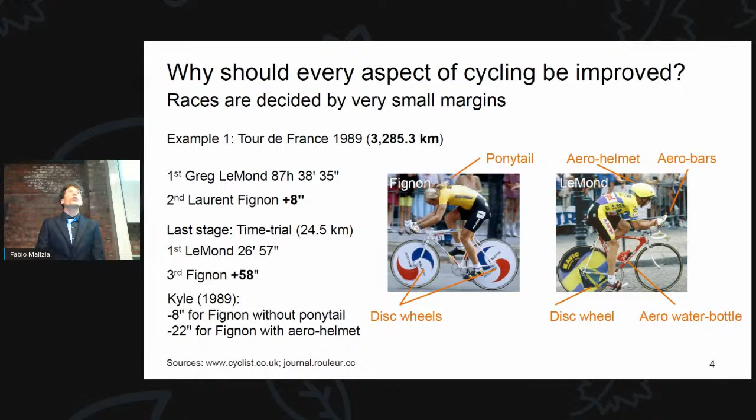Fignon had 2 disc wheels, but he didn't have any helmet, and his ponytail was flapping in the air. While LeMond had his aero helmet, aero water bottle, 1 disc wheel, and also the aero bars. And Kyle in 1989 found that even just cutting the ponytail would have given Fignon 8 seconds, exactly what he needed to win the Tour de France.

The third example is the Tirreno-Adriatico, a 1,000 kilometer race, 25 hours of racing, and Roglic last year won by only 0.31 seconds. And he gained 26 seconds in the last stage, a time trial, which is actually held in my hometown in Italy, San Benedetto del Tronto. And if we see the pictures, again, there is different equipment that was chosen.

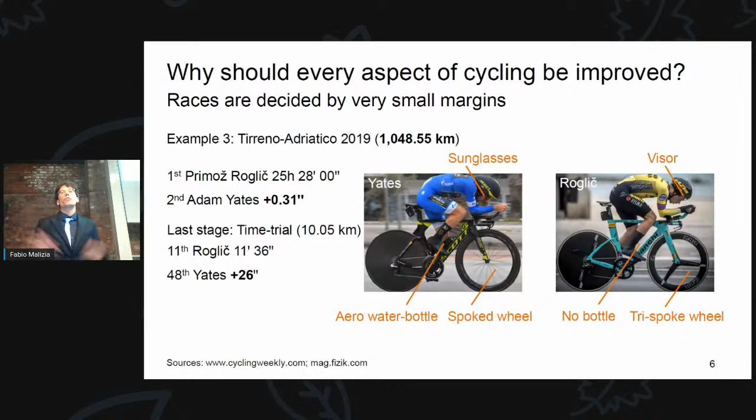Yates used the aero helmet, but not a visor, sunglasses, while Roglic used the aero helmet with a visor in front of him. Roglic didn't have a water bottle, he had a 3-spoke wheel, while Yates had an aero water bottle, but a spoked wheel, a wheel with many spokes. This time we have a different wheel in front of the bicycles.

Then we have shown that a small margin can really make a big difference in a cycling competition, both in single races and multi-stage races. Now I will introduce something we will see later. Aerodynamics is actually the major resistive force, up to 90% on a flat stage when you are riding fast. And through the mathematical models, Martin et al.

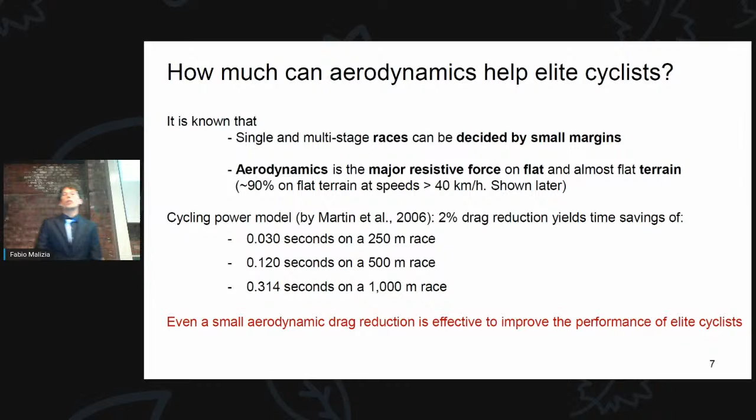It showed that even with a 2% drag reduction, cyclists can achieve a significant reduction in time. As we can see, these differences were always significant for the previous example. Then, a small conclusion of this introduction: even a small aerodynamic drag reduction is effective to improve the performance of elite cyclists.

Now, the contents of the presentation: after the quick introduction, we will go to the state of the art and research gap, then the objectives. Then I will take a step back. I will show the physics of cycling and the methodology I applied. And then we go to the results of my research project and then the conclusion.

Now, cycling aerodynamics includes many aspects. As we see here, Roglic riding a bicycle. We have the cyclist. Different cyclists have different anthropometric characteristics. They can have different positions on the bicycle. They can wear different skin suits, different helmets, and also the helmets can have different designs. Also the handlebar, which influences the cyclist's position. The frame, of course, every manufacturer has its own frame.

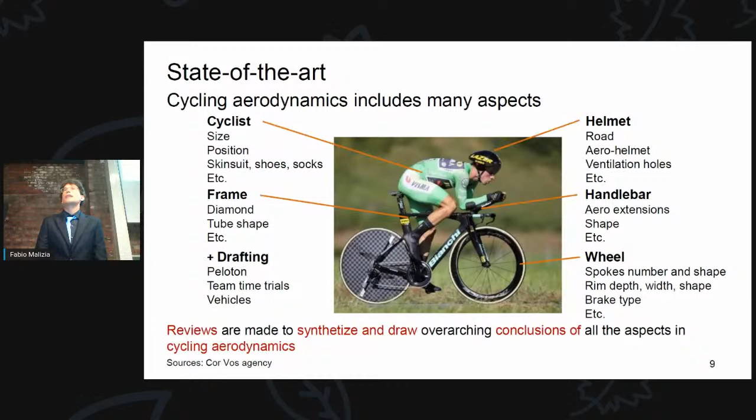But again, also the wheel. The wheel can have different types, disc wheel and spoked wheel in this example. But also the spoked wheel can have many spokes, different shapes of spokes, rim depth. There are many different designs. And cyclists don't usually ride alone, so there is also drafting to take into account. As we see, it's very complex. Cycling aerodynamics includes many aspects, and therefore there are reviews which try to synthesize and give conclusions about cycling aerodynamics.

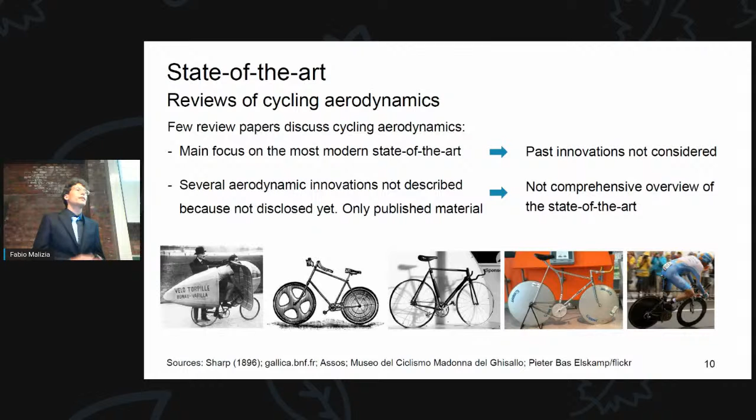Now, there were already reviews about cycling aerodynamics, but they mainly focus on the most modern state of the art, and they focus mainly on the published material, only research done by researchers in academia. While there were also past innovations, which had a role in the past. Even 100 years ago, we found some aerodynamic innovation in cycling, the first pictures from the left, for example. And we also need to take into account the innovation in aerodynamics made by manufacturers, because actually they also make the state of the art.

If we narrow our focus on the wheel, we see that in the Tour de France, which is riding right now, there are 14 different wheel manufacturers for the 22 teams. Every manufacturer produces different types of wheels, spoked wheels, 3-spoke wheels, disc wheels, and even different types of these wheels. For example, they have different spoked wheels with different rim depth according to every situation of the race.

But the previous research done in cycling aerodynamics mainly focused on comparison of these wheels, since there were so many designs. But there are discrepancies between the different studies, and we also found a lack of uniform testing, and this is also causing the discrepancies. About these two aspects, I will show some slides now.

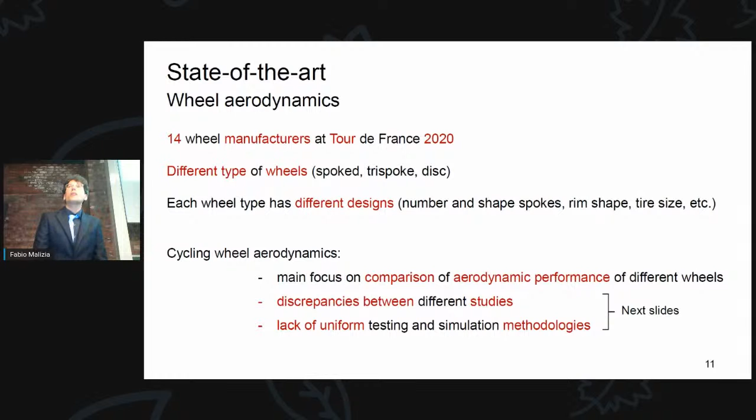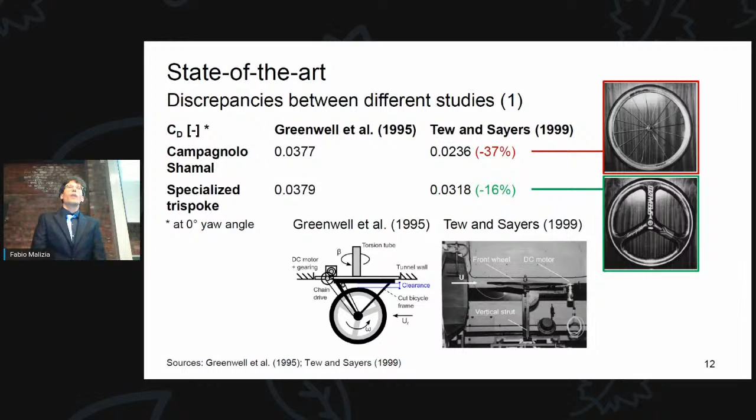Greenwell and Tew and Sayers tested two wheels that were the same, a spoked wheel and a 3-spoke wheel. And at 0-degree yaw angle, meaning when the wheel is aligned with the flow, they found even a 37% drag difference. As we remember, at the beginning we talked about marginal gains. 37% of difference is quite high when we need to choose the right wheel.

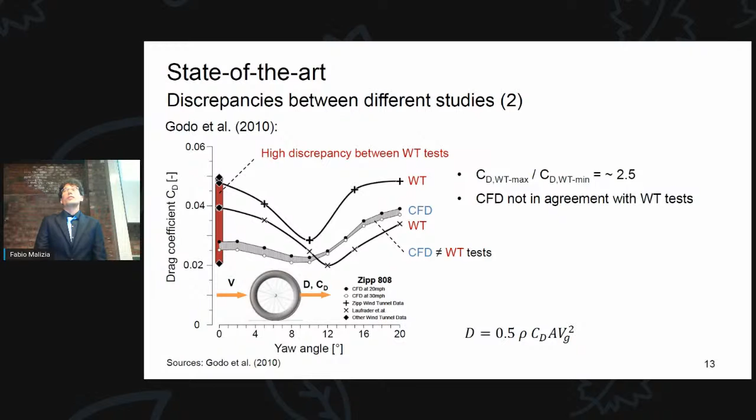The second example is Godo et al. They reported their CFD simulations and some wind tunnel tests available in the literature. Changing the yaw angle, meaning when there is a crosswind, the difference in the wind tunnel results varies between 10 and 40%. The trend is not really the same, and even the CFD simulations don't have the same trend as the wind tunnel tests. Higher discrepancies are found at the 0-degree yaw angle, the red column on the left, where some tests provided a drag coefficient of 0.02, while others 0.05. This difference is really quite substantial when you have to choose a wheel.

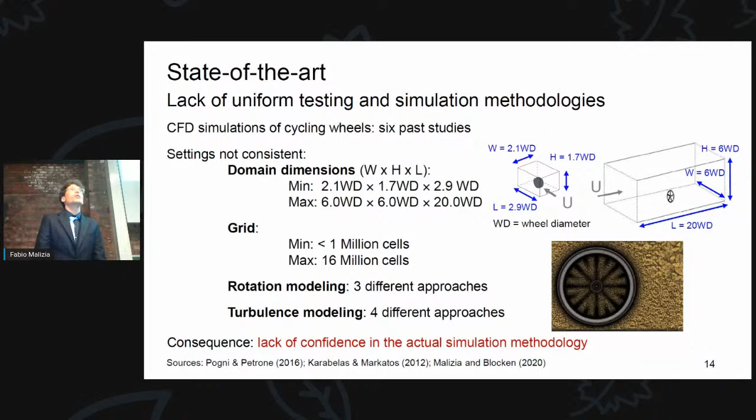And for the way the wheel rotation was modeled, 3 different approaches were used, and for the turbulence modeling, 4. This means that there is a lack of confidence in the actual simulation methodology, meaning also, for me, when I started this research project, I actually didn't know which settings I should use. Therefore, I identified this research gap.

We need an extensive literature study, also to not talk only about the recent state of the art, but also the past one, and include also the innovation made by manufacturers that had a contribution to actual records or competition, to win a competition. When we talk about wheel aerodynamics, we need to know the impact of computational parameters and physical parameters, and also to understand the difference between testing or simulating a wheel isolated or together with the bicycle and the cyclist, because often the wheel is simulated or tested alone.

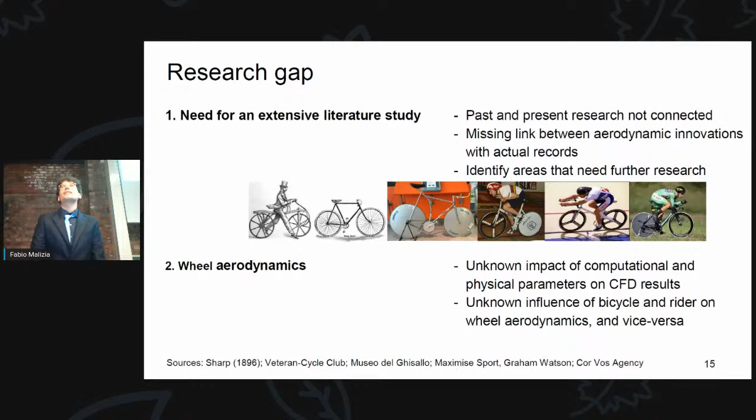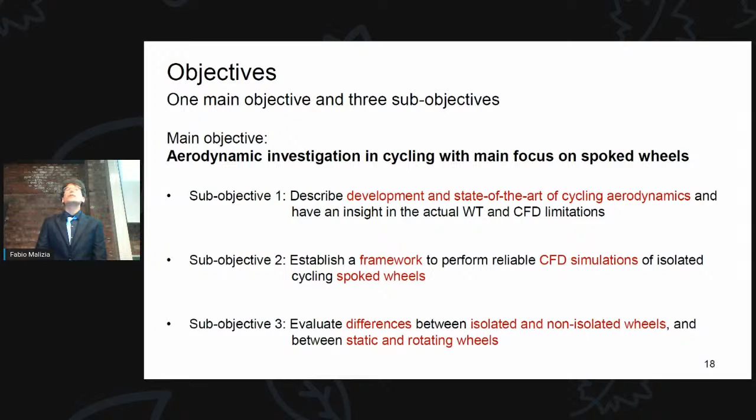Therefore, the main objective of my thesis is to perform an aerodynamic investigation in cycling with main focus on spoked wheels. This yields 3 sub-objectives: describe the development and state-of-the-art of cycling aerodynamics, then establish a reliable framework to perform CFD simulation of spoked wheels, and then lastly, evaluate the differences between isolated and non-isolated wheels and static and rotating wheels.

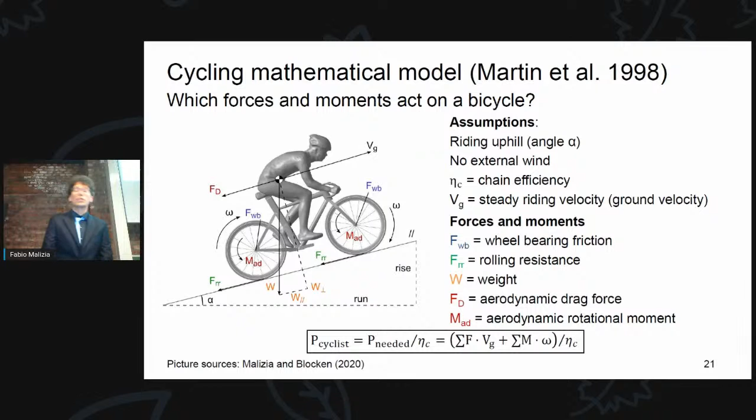Also, there is an aerodynamic moment caused by the rotation of the wheels. Often this quantity is not taken into account in the model simulation. If we put all together, including also the efficiency of the chain transmission, this eta C, we can have our model. But what I want to show here mainly is the dependence of every force and moment on the velocity.

The aerodynamic terms are dependent on the square of the velocity, while the rolling resistance doesn't depend on the velocity in this model from Martin et al. There are some papers recently that question this dependence, but in general, we will consider here that they are not dependent. Then the potential power loss due to the weight is not influenced by the velocity, while the bearing friction has a velocity term in the equation.

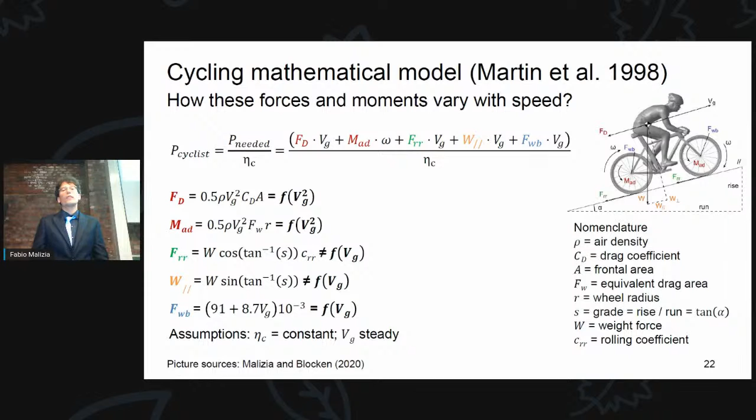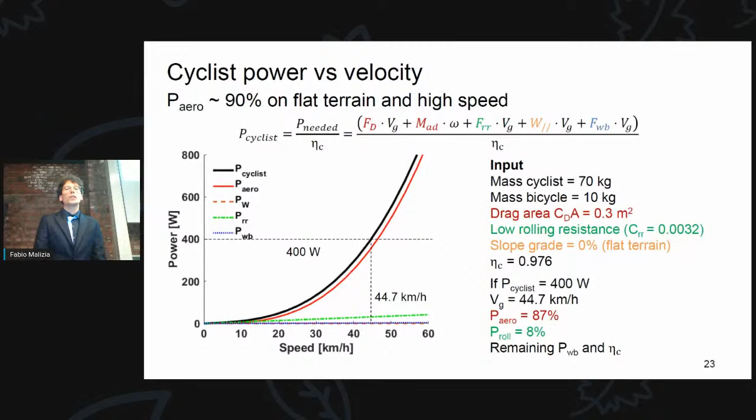Then, if we play with this model and we put as input a cyclist of 70 kilos, a bicycle of 10 kilos, an average drag area of 0.3 meters squared, riding on a flat terrain at 0%, you can see that aerodynamics is the major resistive force when we are at high speed, almost 90%. Then, if we vary the drag area, which is a quantity related to the aerodynamics of the cyclist, from 0.2 to 0.4, there will be a difference of almost 10 kilometers per hour.

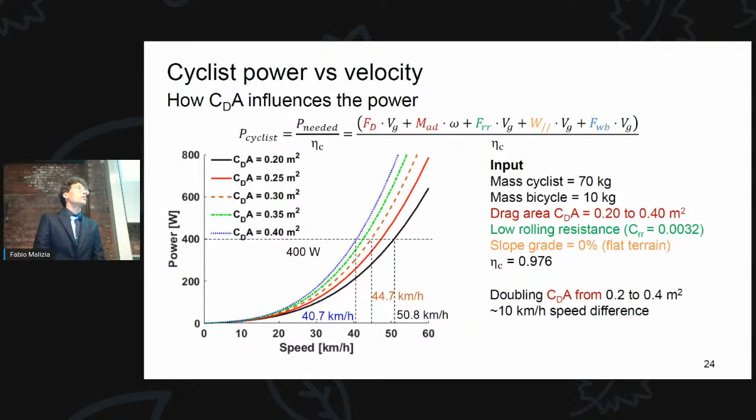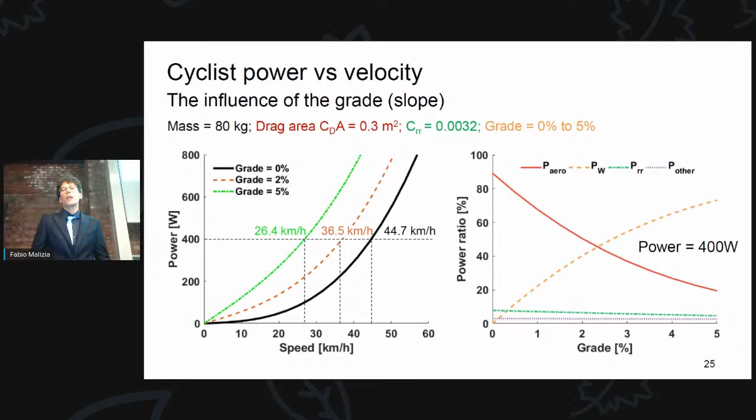Even when we go uphill, with a grade from 0 to 5%, at the beginning, when the slope is not much high, the aerodynamic power loss is still the major resistive force, while going more uphill, the potential power loss will be the major resistive force, but still aerodynamics play an important role. However, at the end, this was mathematics, but how fast can you go with a bicycle?

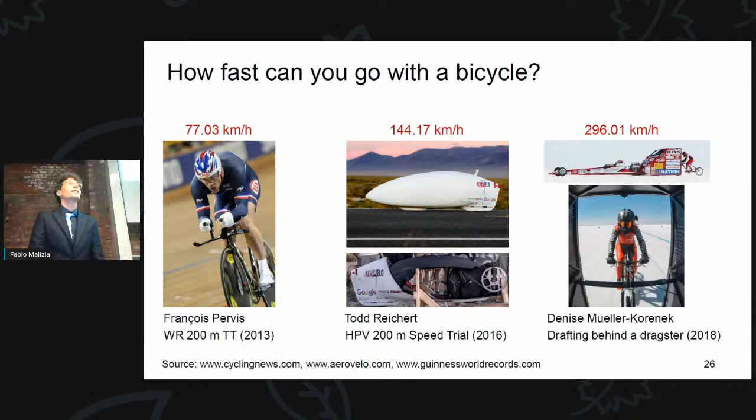These are 3 examples. In the world record of the 200-meter race, he managed to achieve an average speed of 77 km/h. If now we question what is a bicycle, and we consider a bicycle also a vehicle with 2 wheels, just powered by a human, and with an aerodynamic enclosure, they managed to achieve a 144 km/h maximum velocity. But if we ride a bicycle behind a dragster, I would never do it because I would be scared, but in general, Denise Mueller-Korenek managed to achieve 296 km/h, which is impressive.

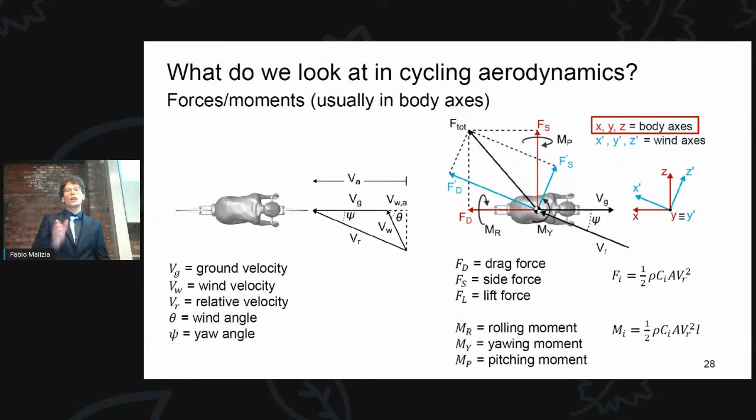In general, in cycling, we use a body axis, therefore the forces are aligned with the cyclist. Therefore, later when I talk about drag, I will always refer to the force component aligned with the riding direction. But we can also have a look at pressure, velocity, and vorticity. And how do we do this? We can do this through wind tunnel tests, CFD simulation, or field tests.

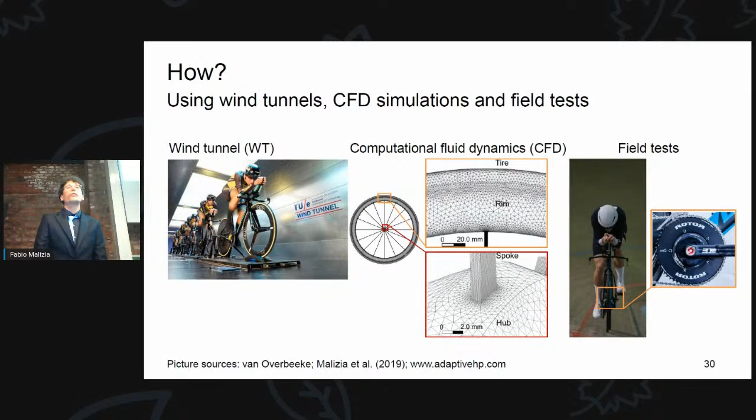Now, I will briefly show the first 2 methods. In general, a wind tunnel is a tunnel or a pipe, as you can imagine. There will be air moving inside, and the cyclist will usually be placed on a force balance, and this force balance will provide you the forces and the moments acting on the cyclist. But we can also put pressure taps on the cyclist's body, which will provide the pressure on the cyclist, or use optical methods or other methods to obtain information about the velocity.

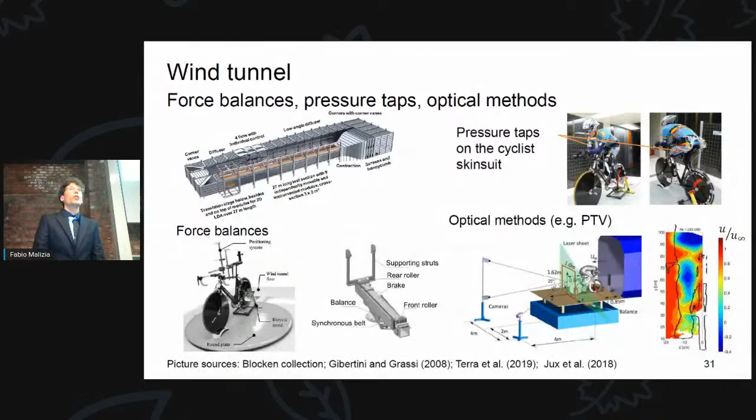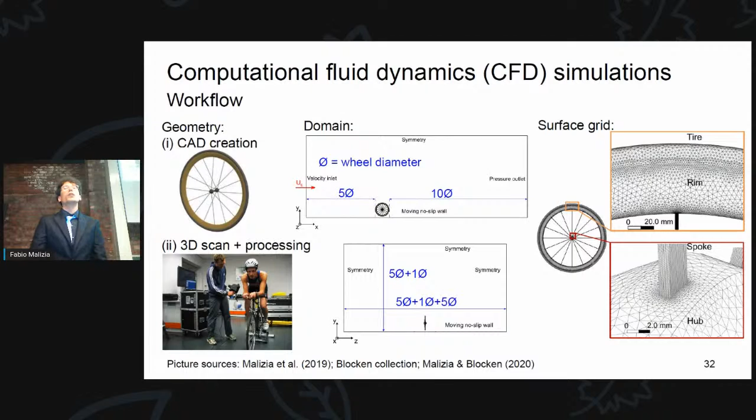While in CFD simulation, in the usual workflow, the first step is to create a geometry. We can do this through CAD design or by acquiring the geometry with a 3D scanner. Then we build the domain and the surface grid. We discretize the surface of the body of interest, in this case, the wheel. Then we create the volume grid. Then we put in all the settings, run the simulation, and post-process the data.

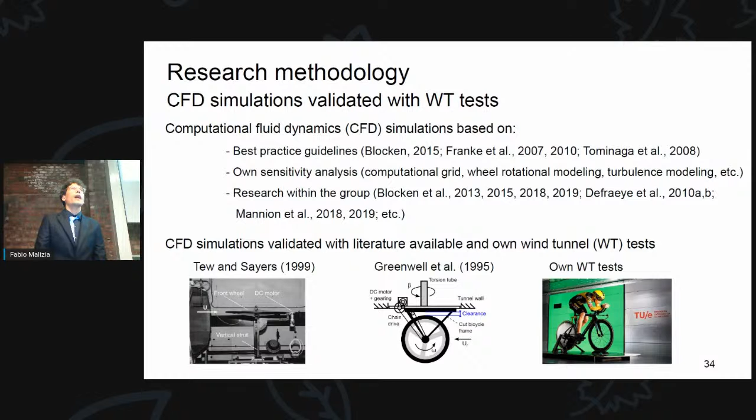What I've done in my research was mainly performing CFD simulations based on best practice guidelines, my own sensitivity analysis, and research within the group. These CFD simulations were validated with wind tunnel tests available in the literature and, when possible, my own wind tunnel tests. Now I'm going to show the different parts my research project is constituted of.

In the first part, I'm showing the evolution of cycling aerodynamics. Many people believe that cycling aerodynamics is a very modern topic, but actually it isn't. Even at the beginning of the cycling era, in the late 19th century and beginning of the 20th century, there was a sort of empirical knowledge of cycling aerodynamics. We found cyclists riding inside aerodynamic enclosures. These are the first pictures. But there was also the development of the dropped handlebar, which we still find nowadays. Cyclists were also riding behind motorcycles because they found that while drafting, they could achieve a higher speed.

However, due to some bans of the UCI and World War II, probably, aerodynamics kind of disappeared from cycling. There was no aerodynamic innovation; it was never taken into account in these years. While in the late 70s and beginning of the 80s, there is a rebirth. We find the first skin suit. Then bicycles also started to be built with aerodynamic tubing, and new handlebars, both in shape and position.

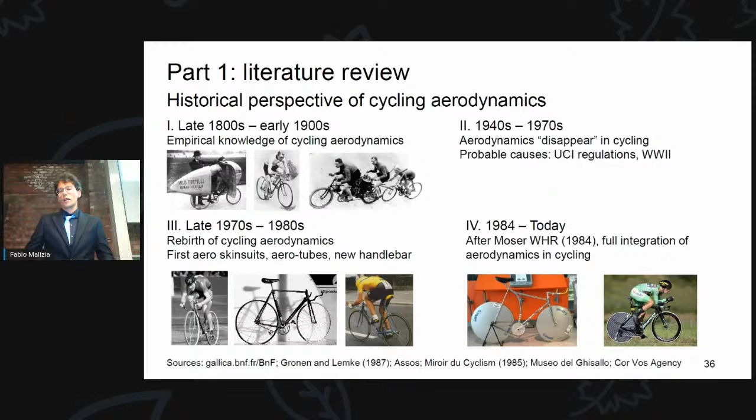But they didn't make a real breakthrough, which happened with the world hour record of Moser, achieved with a bicycle with 2 disc wheels. However, this bicycle didn't have aerodynamic tubing, for example. Therefore, there was still some possibility to improve. And after that record, aerodynamics started to always be considered in the design of new bicycles.

Now, the literature review covers all the aspects. However, here for brevity, I will focus only on the wheel. And as we can see, already more than 100 years ago, there were designed and patented wheels that are the same ones we consider aerodynamic today, a 4-spoke wheel and a disc wheel. But there was no systematic use of these wheels.

I couldn't find a real motivation, but it's probably due to the fact that these wheels have high instability when there are strong winds. Indeed, in these pictures, there are 2 bicycles with aerodynamic enclosures and 1 bicycle with disc wheels, and that bicycle crashed on the last curve due to a wind gust. Then, for 100 years, wheels were not innovated, at least in terms of aerodynamics.

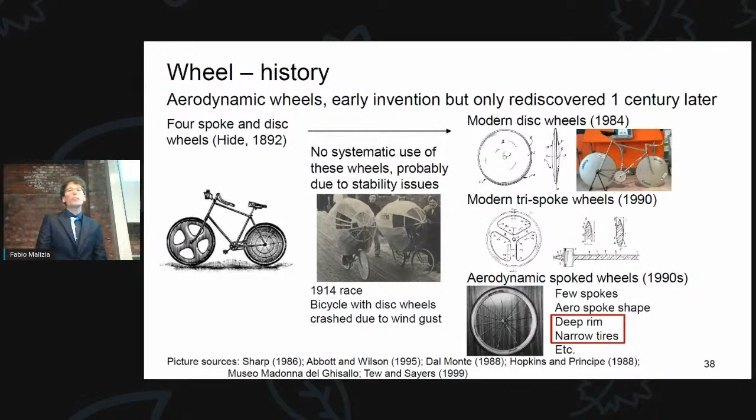But in 1984, we find these disc wheels, and soon after, 3-spoke wheels and also aerodynamic spoked wheels were developed. For example, wheels with fewer spokes, aero-shaped spokes, deeper rims, narrow tires, and other aspects. A few of them I will show now.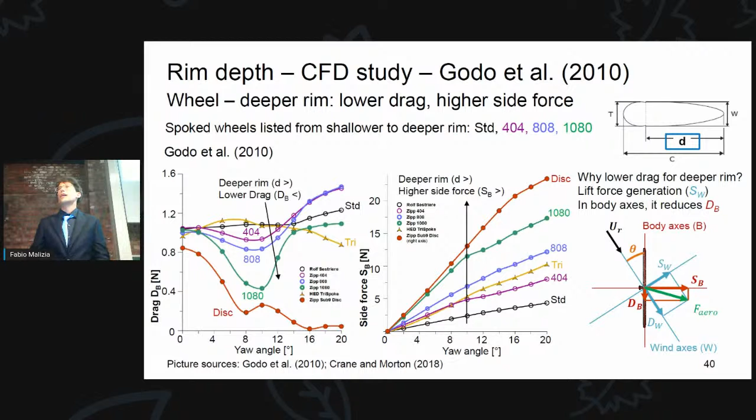As we see also, the disc wheel has the highest side force, as before we said, that has stability problems.

Then, if we consider the rim to tire width ratio, these two numbers in red, T is the tire width and W is the rim width. It was found that this ratio should be equal to or smaller than 1 to have the best aerodynamic performance. These wind tunnel tests were performed by Crane and Morton in 2018.

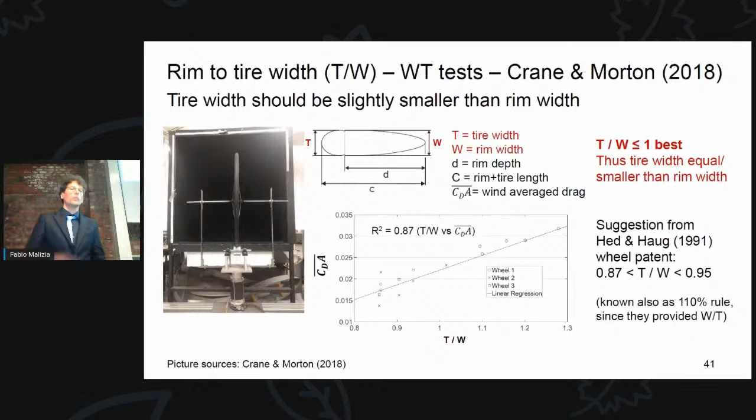However, this was not actually new, because there was a patent in 1991 stating the same thing. It introduced the 110% rule, and it's 110% because in the patent they talk about rim width over tire width, which is the opposite ratio. But in general, the conclusion was the same.

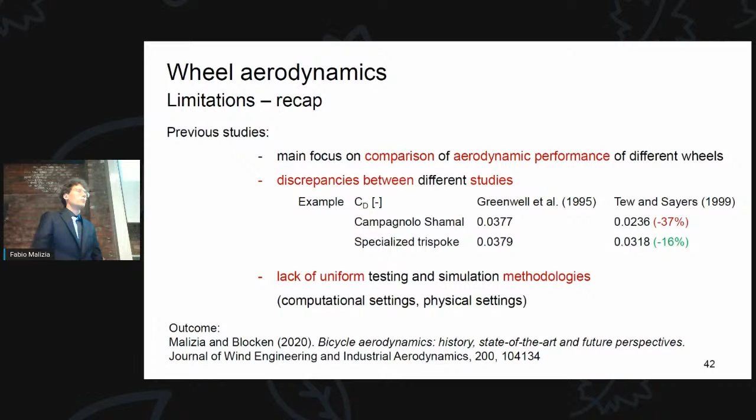However, I want to recap the limitations of these studies: they mainly focus on comparing different wheels or different wheels and tires. There are discrepancies between different studies, even 37% drag difference, and there is a lack of uniform testing and simulation methodologies. The outcome of all the wheel and other aspects of cycling aerodynamics are summarized in a paper.

In the second part, I will talk about establishing a framework to perform a CFD simulation of spoked wheels. Mainly, I will investigate the impact of computational parameters and the wheel-ground contact modeling. There are several parameters, but I will talk only about a few of them.

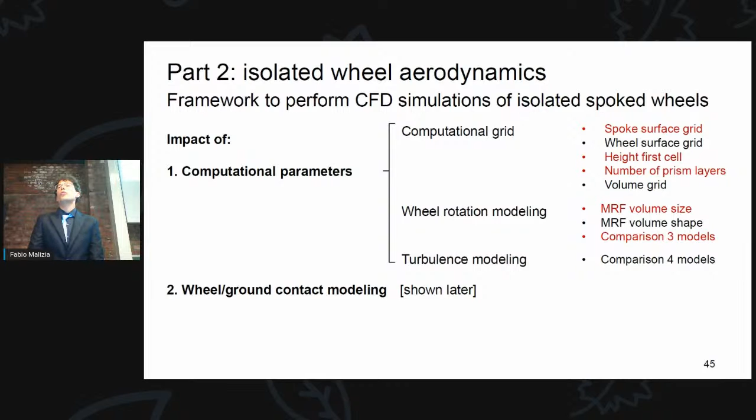Starting with the surface grid, taking the smallest element, which is the spoke, as we talked before about marginal gains. Does it make a difference how we discretize the spoke? Actually, yes, both in terms of computational cost, because if we reduce the grid size on the spoke, the surface grid and volume grid will increase significantly, causing an increase in computational cost, but also in terms of the computed drag.

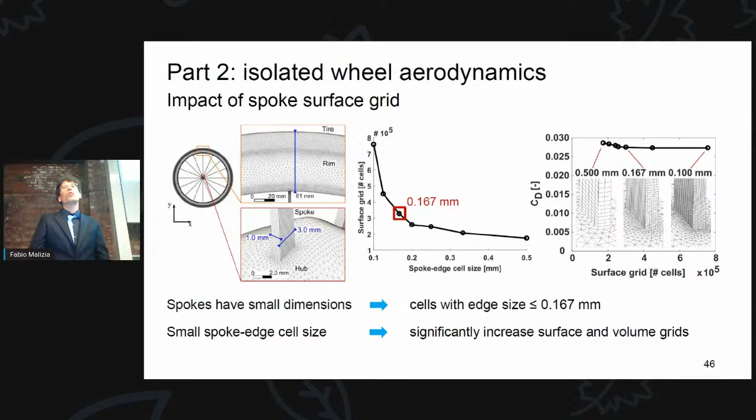The result was that the width of these cells should be smaller than 0.167 millimeters. Just as a matter of reference, a wheel usually has a diameter of 700 millimeters, so we can understand how this scales up the simulation cost. Indeed, we need a small spoke edge size, but not too small, because otherwise the computational cost increases too much.

Then the second aspect is the volume grid, mainly the height of the first cell, which is usually described by the number y plus. The general guidelines for the turbulence modeling I'm using for this type of flow suggest y plus smaller than 5, or best equal to 1. Actually, from the simulations I performed, the maximum y plus I recommend is 3.5, not 5, and ideally always 1. The number of prism layers, these wedge cells here, the minimum is 12, but usually more is better.

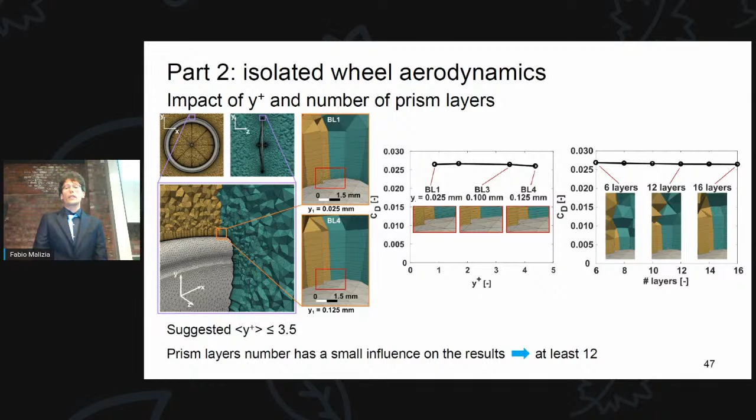Then I investigated the rotational modeling of the wheel. In this type of simulation, there are 3 possible approaches: the rotating wall, where we apply a velocity on the surface of the wheel, and the moving reference frame, where we use a different reference frame with added acceleration terms to reproduce the effect of rotation. In the MRF approach, this moving reference frame volume, shown in gold color, encloses the wheel entirely. In the third case, the moving reference frame approach is applied only around the spokes, while in the external part of the wheel, which is a body of revolution, a rotating wall approach is used.

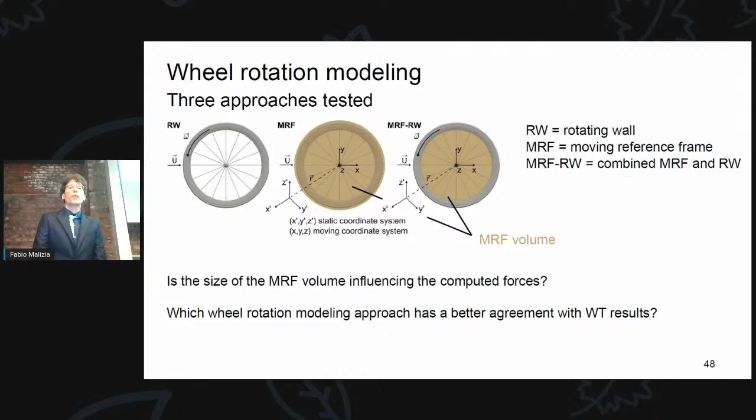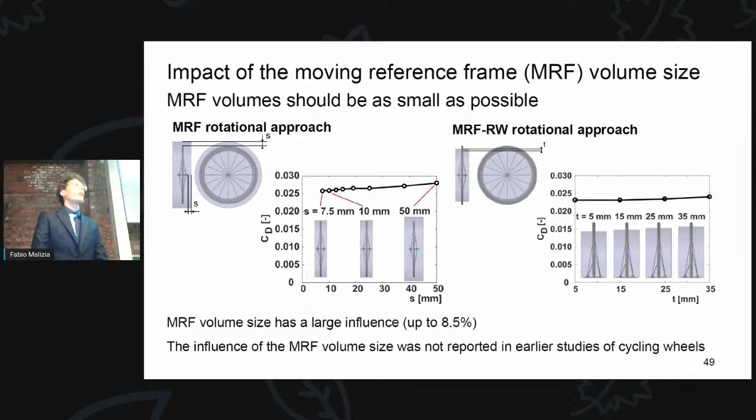Now there are two questions we can ask: does the size of this moving reference frame volume influence the results, and which of the three approaches is best? Actually, the size of the moving reference frame volume has a high influence, and I was very surprised that this was never reported, at least to the best of my knowledge, in other computational studies about wheel aerodynamics. This might also explain some of the differences in results obtained in other studies. The suggestion here is to always use a small moving reference frame volume, in both cases, whether you use MRF or the hybrid MRF-RW method.

If we compare the performance of these 3 rotational modeling approaches against wind tunnel tests, we found that the best model is the moving reference frame with the rotating wall, the hybrid method, giving an agreement of around 2%. If we remember that errors between CFD simulation and wind tunnel tests were even 30-40%, this is quite a good result.

The outcome of this impact of computational parameters is summarized in a paper we published in 2019.

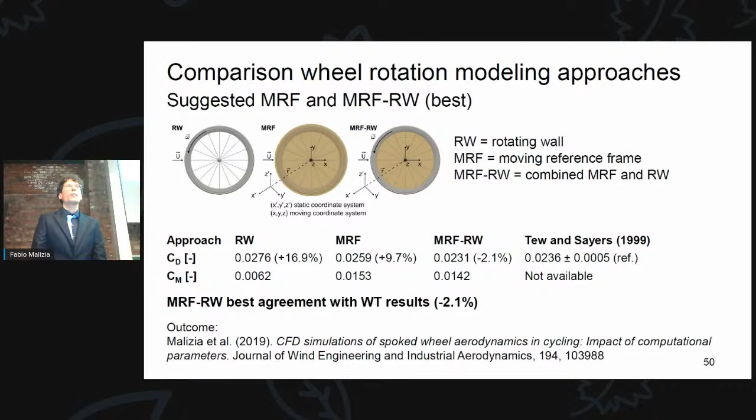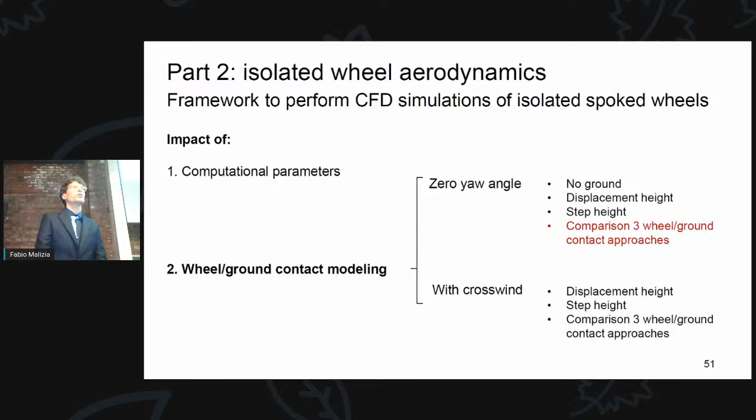The other aspect I investigated is the wheel-ground contact modeling. There are different aspects, including the zero-yaw angle case and with crosswind. I will show the case with zero-yaw angle. Why do we need to model the wheel-ground contact?

In car aerodynamics, this wheel-ground contact modeling has a large influence, but it was not known how it applies in cycling — it was never studied. We also don't know which approach is best for our case, and how much the distance or step height should be.

Therefore, I performed simulations for different clearances between the wheel and the ground, and also applied different step heights, testing two different boundary conditions on the step: a rotating wall and a translating wall.

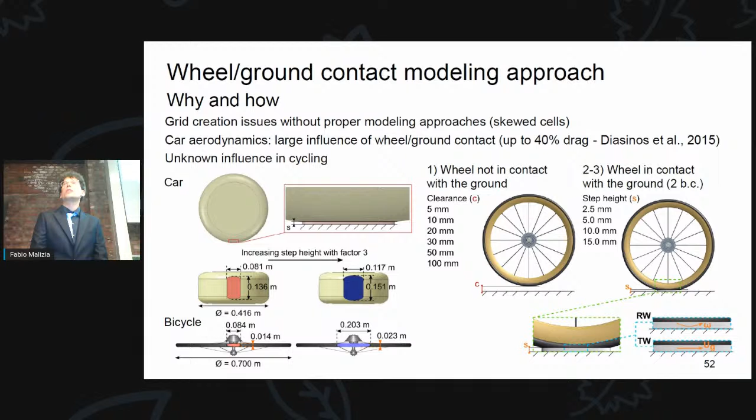The sensitivity analysis I performed showed that the step height should be as small as possible, but a too-small step height will also cause problems in meshing. The clearance should also be smaller, in this case 20 millimeters.

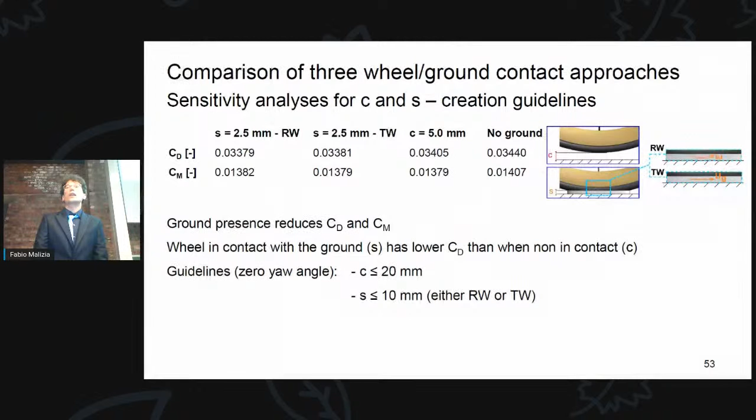The difference between the case with the step, under both boundary conditions, is almost negligible — the first two columns. When the wheel is displaced from the ground, there is a small difference of about 1–2%. Removing the ground entirely will even increase the drag and the rotational moment.

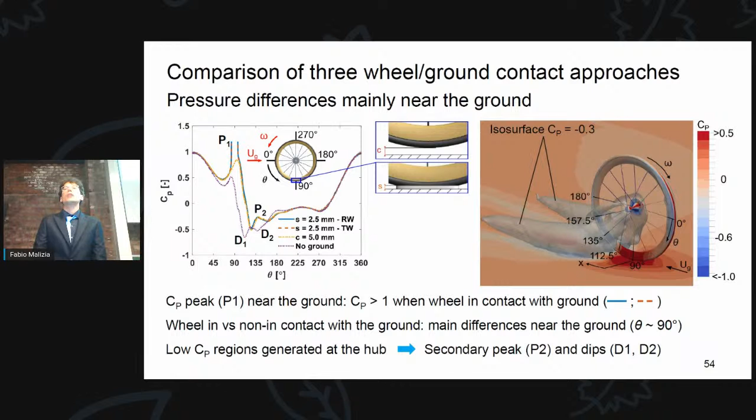There are some small dips and peaks, caused by the interaction of the wheel with the low pressure flow detaching from the ground, from the hub, and from the gears, as seen in the right pictures.

The results of this study, along with the crosswind study, are summarized in two published journal papers. Now we move to the last part of the presentation, talking about the non-isolated wheel.

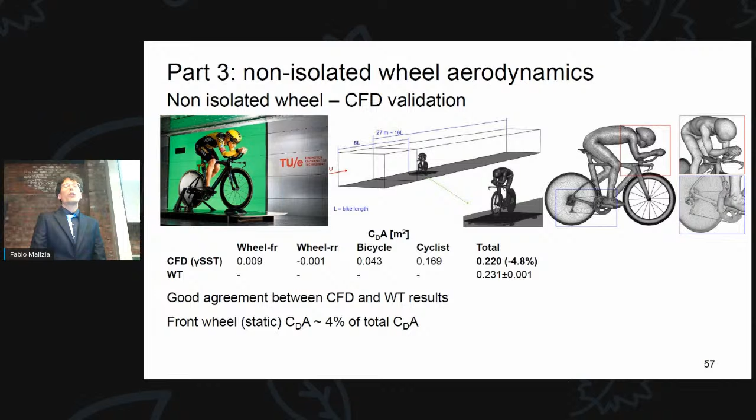We performed our own wind tunnel test at TU Eindhoven, and found that my simulation had very good agreement, 4.8%, which is very good when considering the entire cyclist and bicycle system. The front wheel, with wheels kept static, had an impact of around 4% of the total aerodynamic drag of the system.

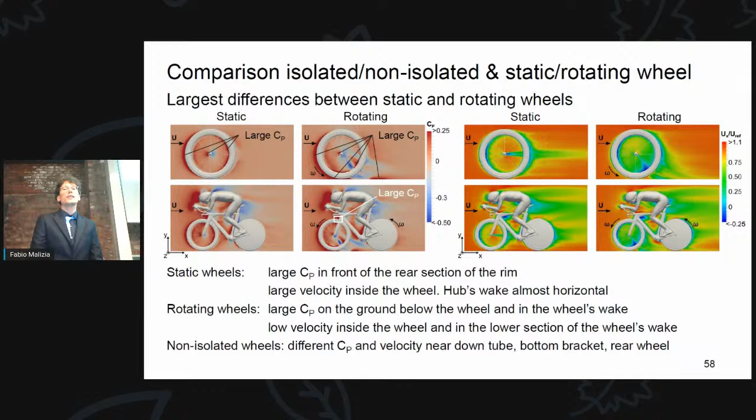In the static case, there is high velocity inside the wheel, while in the rotating case, the velocity is much smaller.

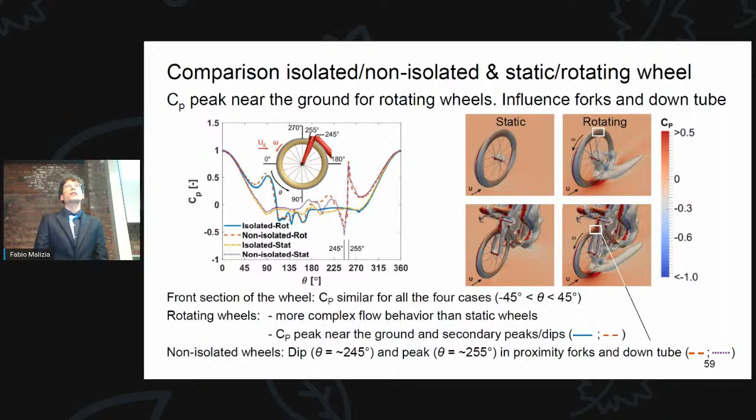Moving in the top rear section of the wheel between 180 and 270 degrees, the situation changed. We observed there are still 2 groups of behaviors, but now what makes the difference is whether the wheel is isolated or non-isolated. The purple and red lines are the non-isolated case, and this dip around 245 degrees and peak at 255 degrees is caused by the interaction of the wheel with the down tube and the forks. Going back to the front part of the wheel between 315 and 360 degrees, all cases again show a similar behavior.

Now we can go to the conclusion and novel aspects of this research. We found that even how we discretize the spoke-edge size has an impact, and that we should have a small cell size for the spokes.

For the prism layers, we should have a Y plus smaller or equal than 3.5, with at least 12 layers. When we apply a moving reference frame volume approach in the hybrid case or not on the full case, the size should be kept as minimal as possible. For the distance between the wheel and the ground, it should be at maximum 20 millimeters when there is no wind, or 10 millimeters with wind, and the step height should be maximum 10 millimeters.

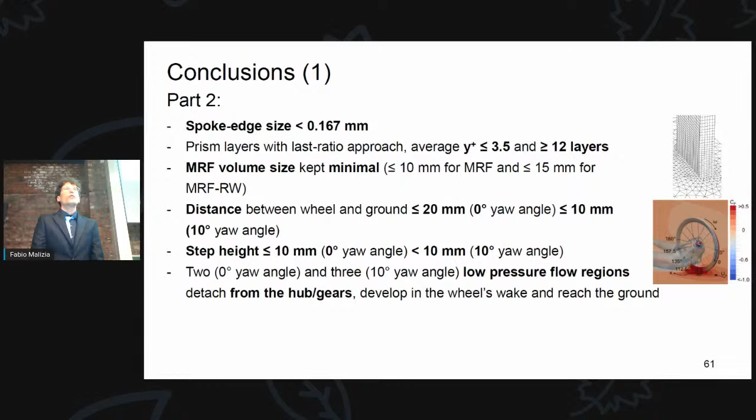We also made some flow visualization to show how the flow is behaving around the wheel. Then the last part of the conclusion covers some other results which I didn't discuss before.

We found that the main difference in the pressure contours is caused by whether the wheel is static or rotating. The rotational moment also has a large influence on the performance of the wheel, and this quantity is often neglected, while it is important to quantify the performance of the wheel. It also has an impact on the total cyclist-bicycle case.

We found that the low pressure flow region identified before for the isolated wheel case is also found for the non-isolated case, but only if the wheel is rotating.

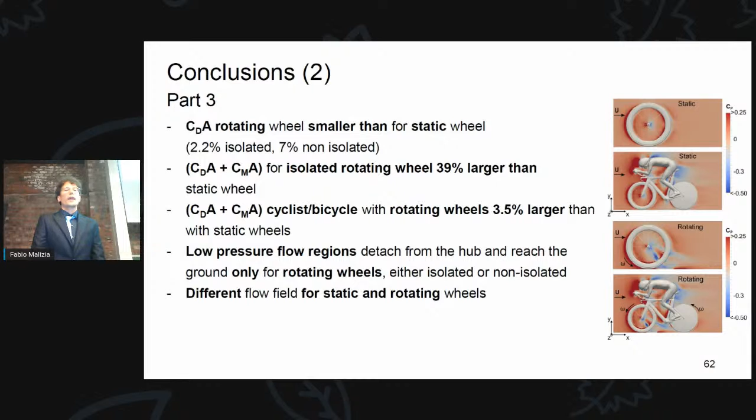The novel aspect of the thesis is that I provide a comprehensive review of the evolution trends in cycling aerodynamics. There was a first detailed quantification of the impact of computational parameters and also of the impact of wheel-ground contact modeling. I provided CFD guidelines to perform simulation of spoked wheels and also flow visualization around the spoked wheel, and we also got more in depth about the effect of rotation on the wheel.

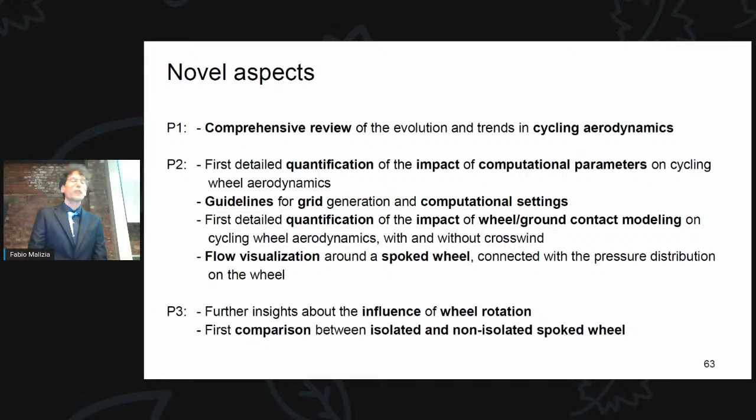I also made comparisons between isolated and non-isolated spoked wheels, which was also new. Thanks.

Can I speak from this side? Yes, no problem, it's a multi-directional one. Okay.

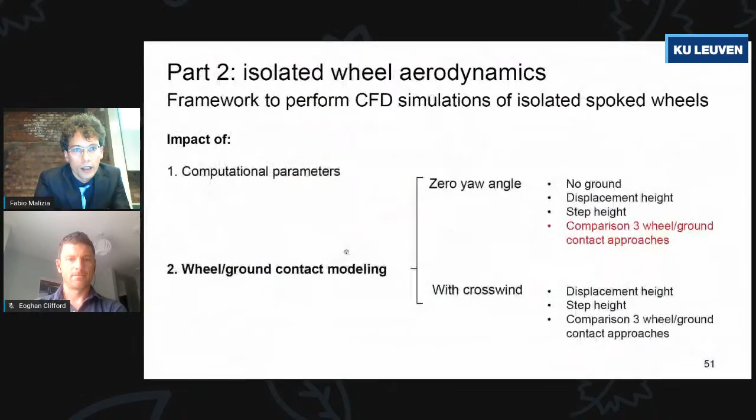Yes, I can. Let's think for simplicity of the case with the step. I think I also presented one slide, but now it's complex. Can we put the slide up, Natasha, as well? Sorry, because with the slide it's better. Okay, this slide.

Okay, now we see. For example, the bicycle has a footprint, in this case with the step, in the last pictures on the bottom, which changes in size when we change the step height. But if we think of the case with crosswind, let's rotate the wheel. The front part of the step facing the incoming wind is much bigger, because if we rotate it, it's not so slender anymore, it becomes more bluff. Since the size is increasing, this causes the differences in the guidance above 10 degrees yaw.

The clearance that you require doesn't need to change further, you believe? It might change. I didn't simulate it. It might change, but we also need to think that the probability of encountering wind at 20 degrees is much lower. That is why I focused on up to 10 degrees, because it's most common.

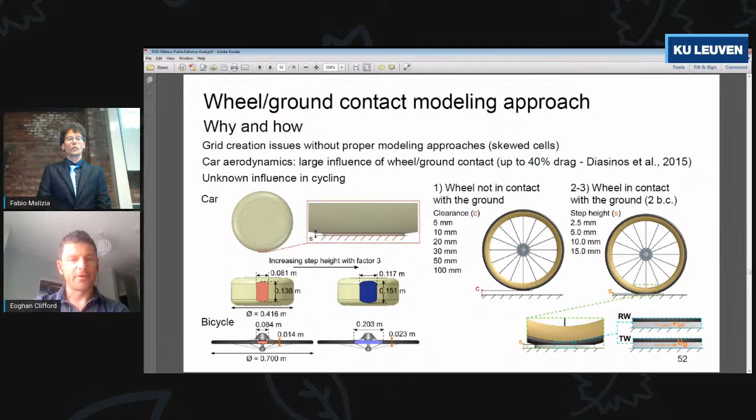Okay, that's all the questions I have, and thank you very much for your answers. You're welcome. Thank you, Eoghan. Professor Grappe, please. Fabio, thank you very much for your great and very interesting presentation.

Your presentation is very complementary to your PhD, and it's a very, very nice presentation. So my question will be rather on the general use of the results of your thesis, more on the practical

field, because our current problem on the teams is to try to make the better choice for the wheels according to the terrain, and our problem is what is the better choice for climbs, flat terrain, and also when you have a lot of acceleration during certain phases of cycling.

For example, when riders are in an effort on a 7% slope, the speed of the bike is not a linear speed, with different phases of acceleration, and you have a lot of kinetic energy. And if you take, for example, wheels with not important height but poor stiffness, it's difficult.

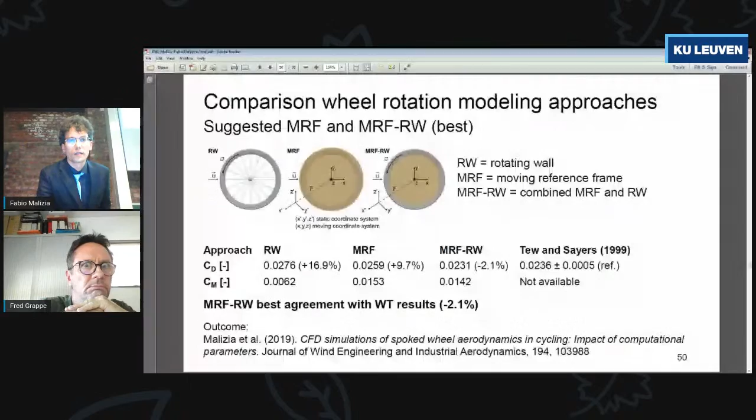Usually it's best to have a tire that is slightly narrower than the rim. And the explanation is probably that if you have a tire much larger, then the flow separates and will not reattach and will not exploit the aerodynamics of the rim. While even if the tire is slightly smaller, maybe there is some separation, but the flow might be able to reattach and follow the rim shape. This is the explanation I gave myself. And also the patent before confirmed the same results.

I didn't test myself, but in general, I would always go to have a tire width which is the same or slightly smaller than the rim width, and try to have not much space between them, and the transition between these two components as smooth as possible. This is what I would do.

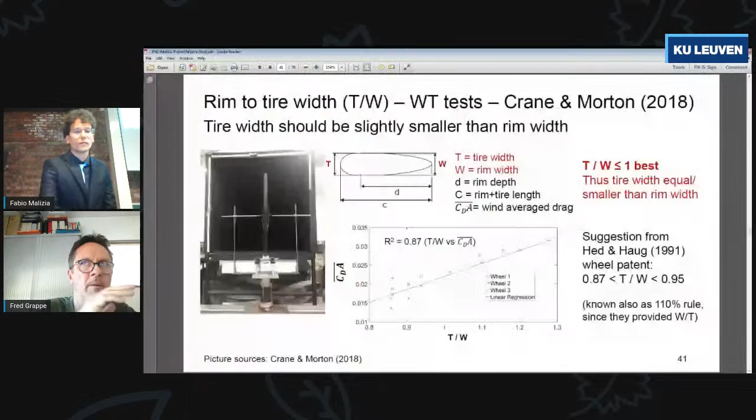Sorry, I didn't understand. Can you repeat, please? Sorry, there was no connection. I lost you. Okay.

My question is about the interface between the tire and the rim. The UCI rules say that you don't have the right to put a surface between the two parts. And sometimes there is not a perfect shape between the tire and the rim. So what is your opinion about that? Do you think the height of this interface is important or not important?

It might cause some flow separation, some recirculation bubbles over there if there is too much space. The best, at least what I've read also in some papers in the past, is that this transition should be as smooth as possible.

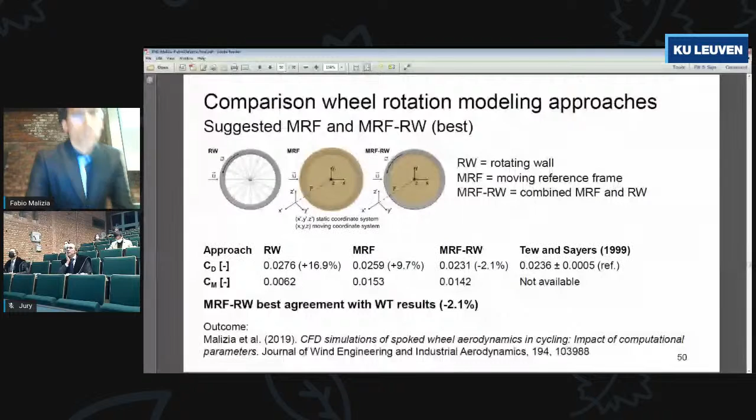Maybe a last question, a little bit more technical. You also showed this comparison between MRF and MRF RW, and your conclusion is that MRF RW is better. Can you explain from a physical point of view why that is? This was in comparison with the wind tunnel test, considering the drag.

The reason is that the spokes are the elements which, while the whole wheel is rotating, are sweeping the air. This is the part of the domain where air is really moving inside, while the acceleration introduced if you use an MRF method will be much more than what actually occurs in a real wheel. Right, so essentially the problem is that outside of the wheel you accelerate with rotation. Yes. While in practice it will be very minimal, something that can be taken into account by the RW itself. At least this is what was shown.

But that is why I was also stressing in the thesis that we really need more wind tunnel tests, because if I know the flow field after the wheel, I will get way more insights to compare my method.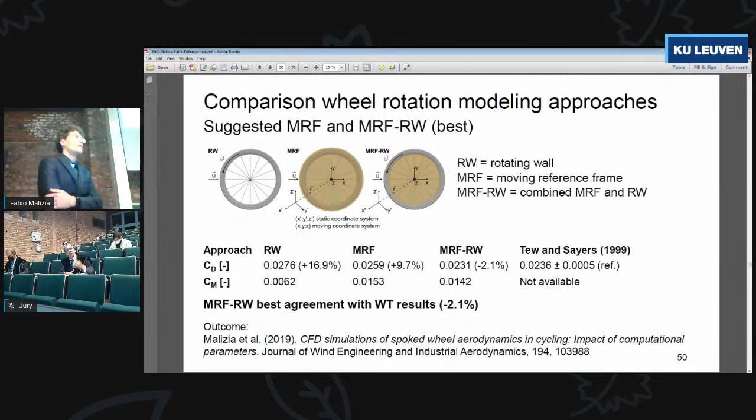Did you see significant differences in separation behavior between the two methods? Because I guess not much. Like it's rotating boundary where you then have separation? It's sort of drag? Not much, because the main drag was caused also in front of the wheel.

But if I decouple them, I see that in a pro-rotating wheel, the tire is the main component, and especially the front part of the tire.

Okay. Thank you. Dr. Van Hoof, please. So thank you very much, Fabio, for the very nice overview you gave in the presentation. I'm not at all an expert in cycling, so I have some maybe for you easy questions, but for me they're interesting.

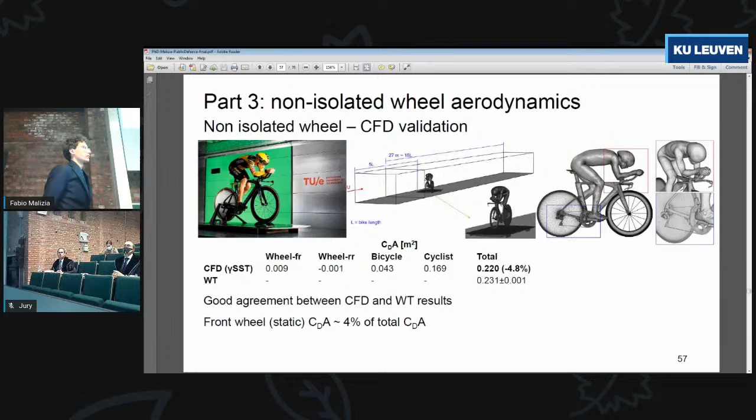Related to this, it was mentioned already in previous discussions that you have different methodologies: rapid simulations, reduced scale experiments, and full scale experiments. You mentioned all have their pros and cons. But suppose the team gives you a job to optimize wheel aerodynamics, with one month and so many euros, and you can choose one of the three. Which one would you prefer and why? You showed all the advantages and disadvantages, the assumptions you have to make in modeling, also in wind tunnel testing, and the uncertainty shown in one of your slides for a single yaw angle. So which method would you choose if you have to choose?

It depends on what they provide me. If they don't provide me the wheels, then wind tunnel testing is excluded, and I would use CFD simulations for sure. Depending on how much money is available, since wind tunnel testing is usually more expensive, if they don't pay much, then again CFD simulations would be my choice.

Otherwise, this is my preference: I always like to combine methods. For example, it would be ideal to at least perform wind tunnel tests on a couple of wheels, then repeat the CFD simulation to get validation data, and then maybe perform the simulation for the rest of the wheels. In general, I like to combine methods when possible, because it also makes the CFD simulation stronger when we can validate it directly with the wind tunnel test.